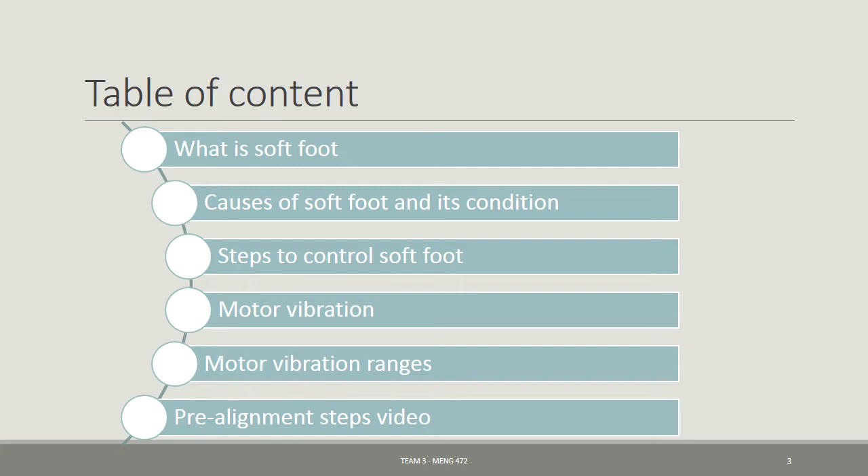What is soft foot? Soft foot is a common issue when aligning rotating equipment. It is a major cause of repeatability problems in shaft alignment measurements. In addition to alignment quality and repeatability problems, it can cause machinery vibration, reduced life in electric motors, and internal clearance problems in gearboxes and pumps.

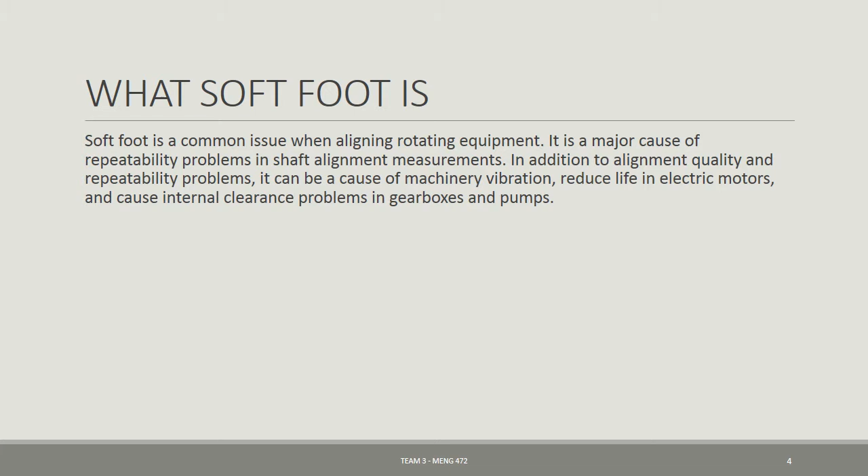Causes of soft foot conditions: twisted or warped machinery foundation or base plates; twisted, warped or damaged machinery feet; improper amount of shims under machine feet; dirt, trash or other unwanted material under machine feet; dents or other flaws in machine base or machine feet; excessive tension on machine feet due to jack bolts warping the machine feet.

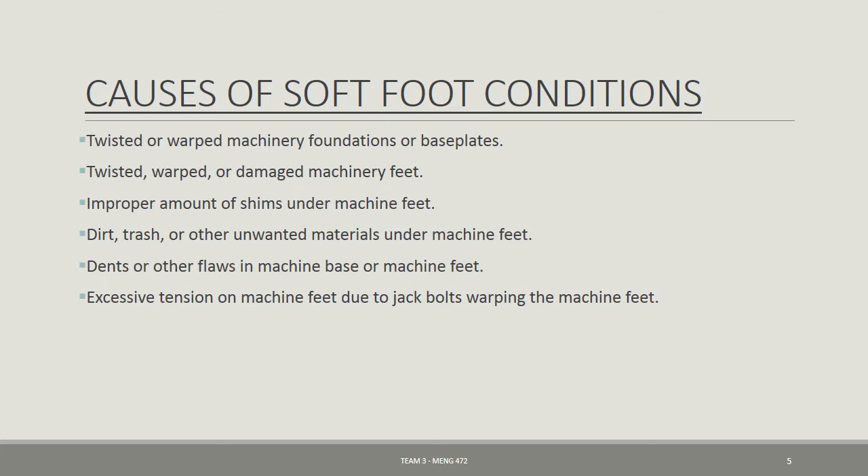In this slide we will talk about what soft foot does to your alignment: an angular or parallel soft foot, a bent or deformed shim, a bolt hole with a burr, a bent motor foot, and the last thing, a deformed machine base.

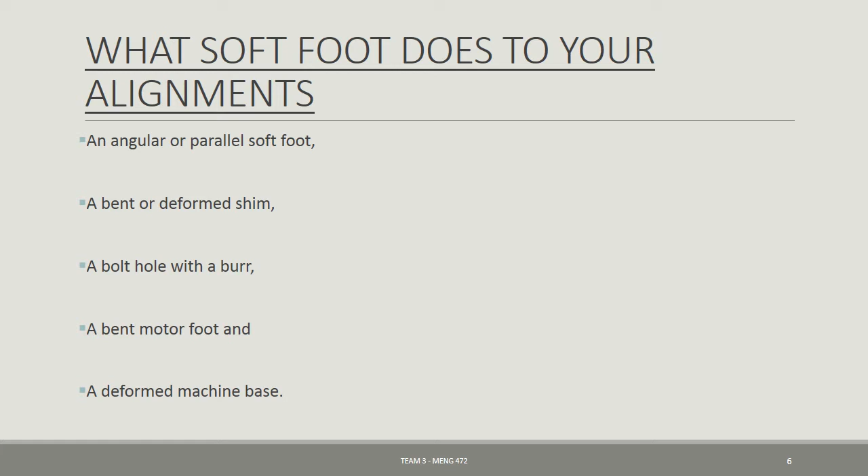Soft foot condition: the position of the shaft changing between tight and loose. If you have used laser alignment tools, you might have noticed a foot that causes a noticeable change in the vertical or horizontal readings as you tighten a particular bolt. Often this is the location of the soft foot condition.

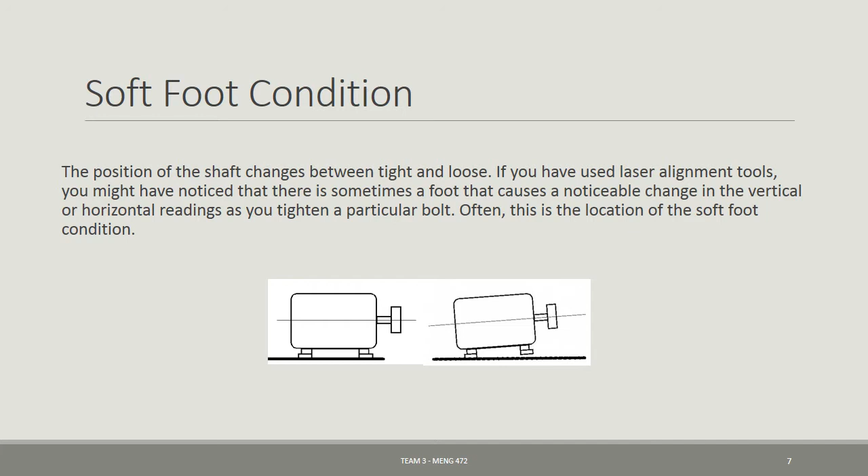How to differentiate soft foot from misalignment and looseness. To differentiate soft foot from misalignment and looseness, even though it causes misalignment when present: one way is to loosen each foot bolt at a time, while the other three are tight. If loosening one of them reduces vibration amplitude...

This tells us, in short, what should be opposite to what one would expect if the machine was okay, and we cause looseness by unscrewing the bolt.

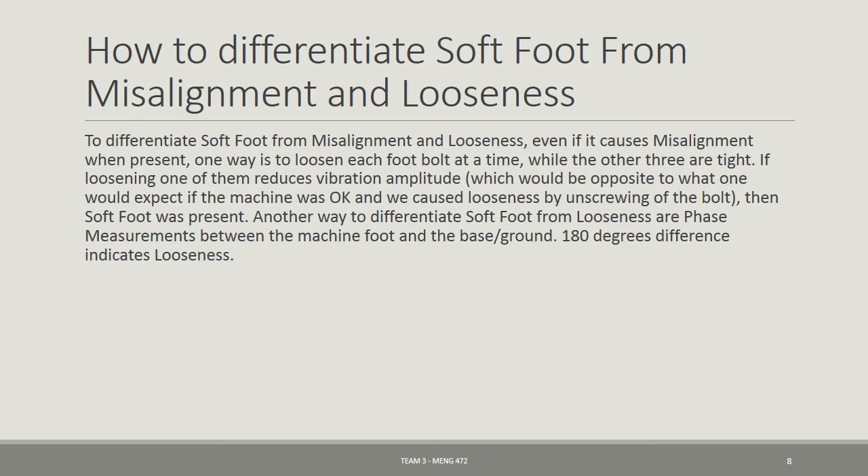Steps to minimize and control soft foot. عندنا هنا بعض الخطوات إنه نقلل أو نتحكم في السوفت فوت. واحدة من الخطوات هي confirm that base plate and foundation are installed and level to specification.

Another step is to make sure the base plate and machine feet are clean, deburred and free from dents in areas to which machinery will be mounted. يعني نتأكد أن السطح اللي يكون عليه المشين نظيف، ما في أي شوائب أو نتوء، عشان ما يصير misalignment، فحتكون المشين على سطح مستوي.

The third step we can use is to use clean flat shims. If you must cut thicker shims from steel stock, be sure they are clean and flat and deburred. عندنا الشيم كما في الصورة في زاوية السلايد، هذا الشيم قطع حديدية ممكن تتحط في جهة من المسامير.

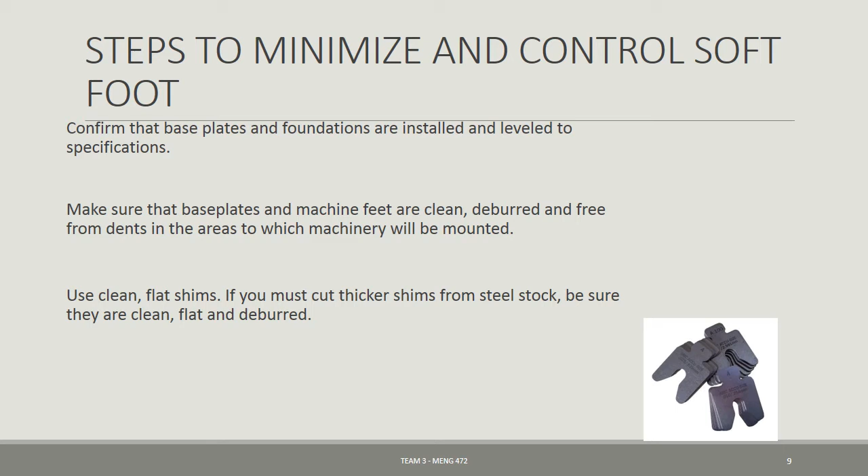نكمل الخطوات اللي نقلل أو نتحكم فيها السوفت فوت. واحدة من الخطوات: when the machine components are placed on the base plate, rough align and perform a gross soft foot check of both the movable and stationary machines.

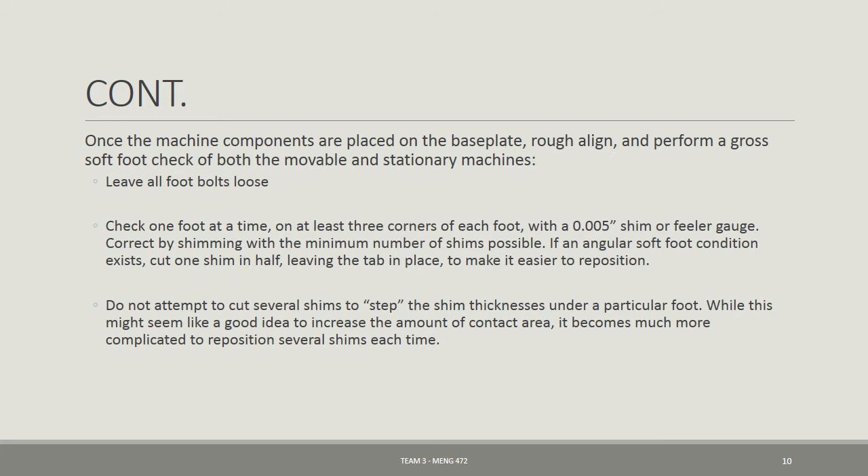Small vibrating motors have been with us since the 1960s. Initially, they were developed for massaging products, but development took a new turn in the 90s when consumers required vibra-call on their mobile cell phones. Today, designers and users alike have learned from 2 decades of mobile phones that vibration alerting is an excellent way to alert the operator of an event, especially when your phone is on silence.

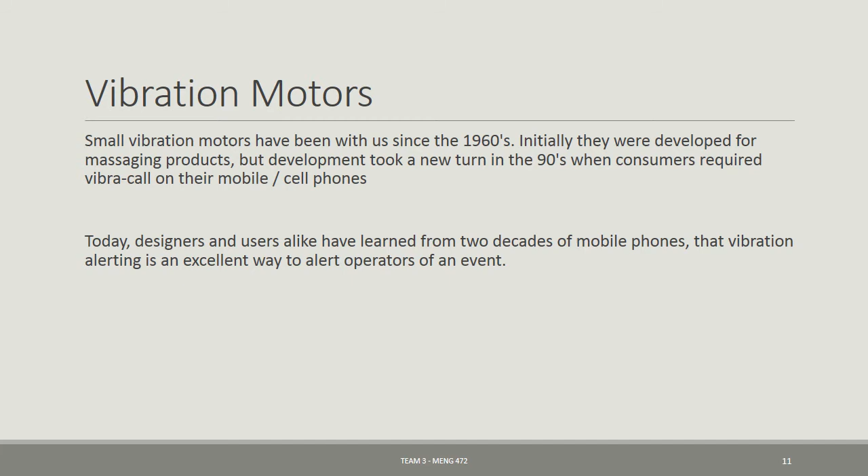These miniature vibrating motors are used in a wide range of products like tools, scanners, medical instruments, GPS, and control sticks. Vibrator motors are also the main actuator for haptic feedback, which is an inexpensive way to increase a product's value and differentiate from competition, like for example toys, console controllers, and the like.

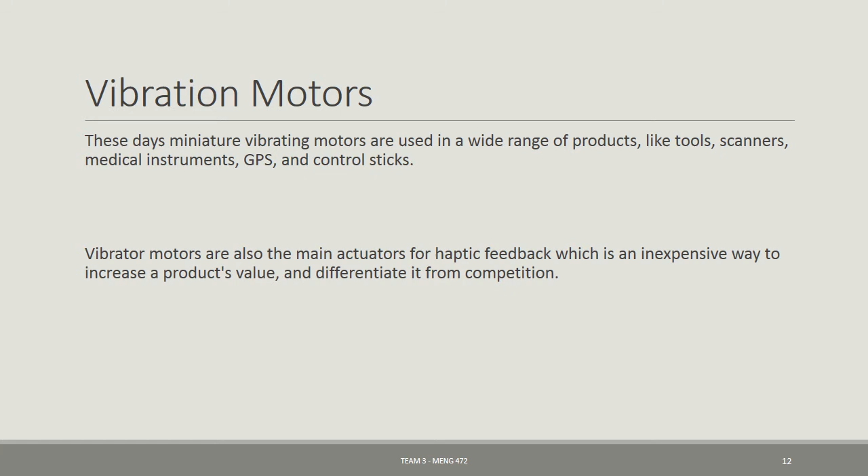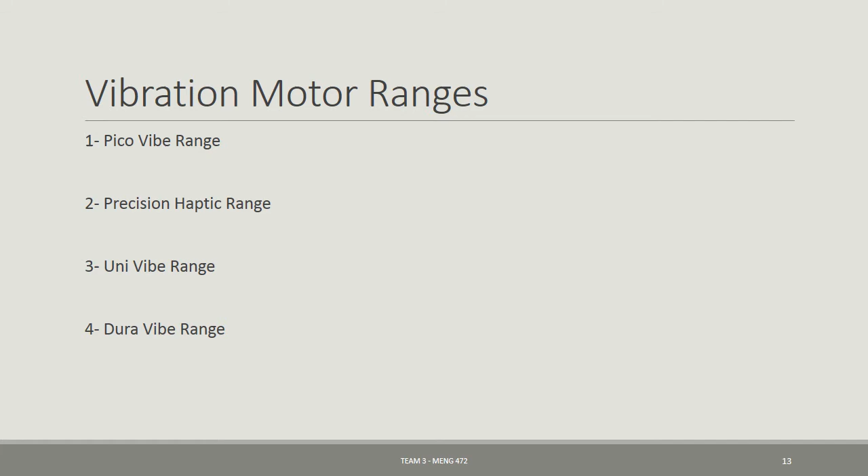There are different ranges for each vibrating motor. First, the Pico Vibe range. Second, the Precision Haptic range. Third, the Uni-Vibe range. Fourth, the Dura Vibe range. We will talk about each range in the following slides.

First, the Pico Vibe range, shown on the right side of the slide. Pico Vibe motors are popular for use in handheld products because their variety of shapes and sizes make them easy for design and mounting. They can also be used in massaging and stimulation applications, provided they have enough power.

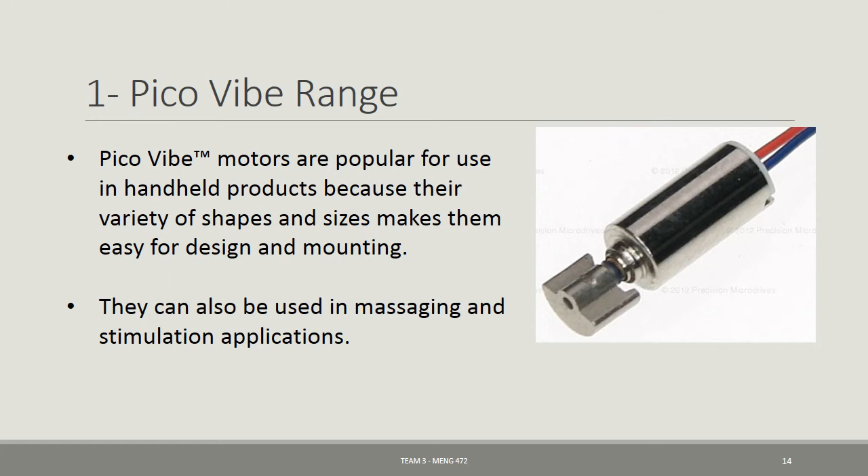My name is Walid Al-Ghamdi and I will continue the vibration motor ranges with the second one, which is the Precision Haptic range, used in a variety of haptic feedback applications like touchscreen mobile phones, GPS units, tablet PCs, desk phones, and even toys.

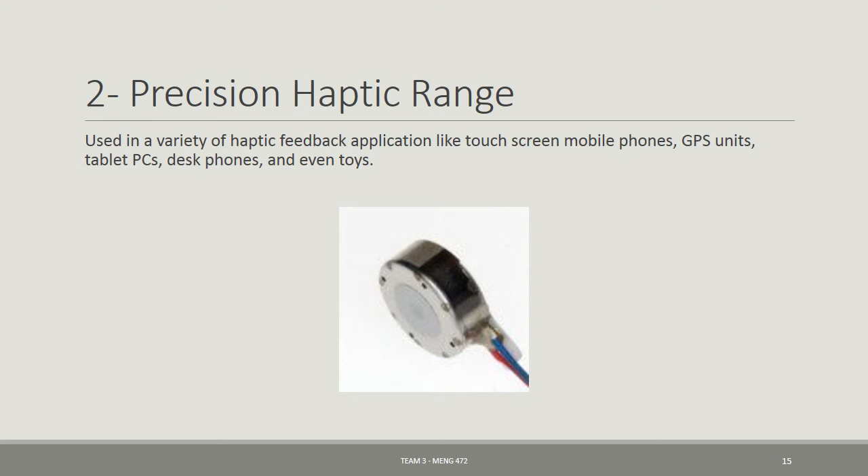The third one is the Uni-Vibe range. They are similar to the smaller Pico Vibe range, but with heavier eccentric masses and higher drive voltages, used in vibration alerting, mechanical aid, and messaging.

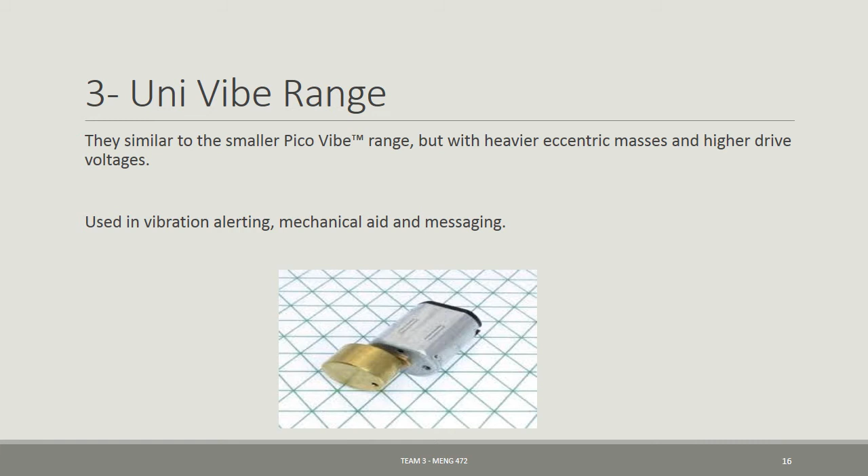The fourth one is the Dura Vibe range, a series of brushless vibration motors which are longer lasting than traditional brushed DC motors. They are ideal for applications which frequently use vibration over a long period of time, handling vibration alerting and messaging applications, commonly used brushless vibration motors.

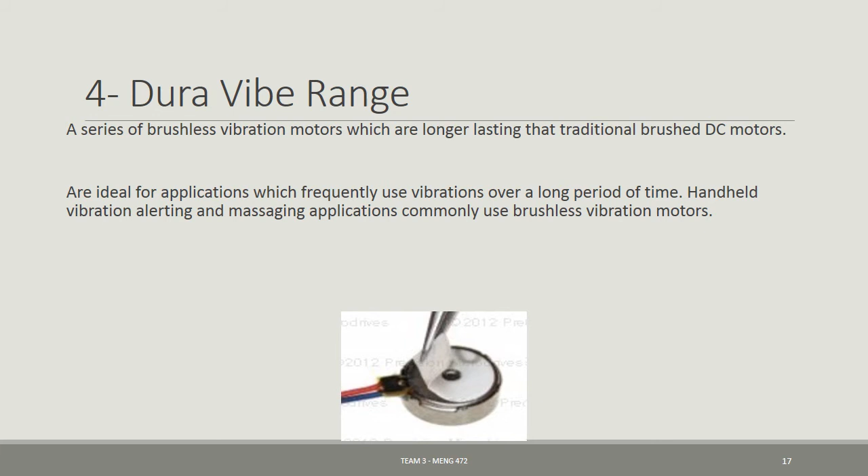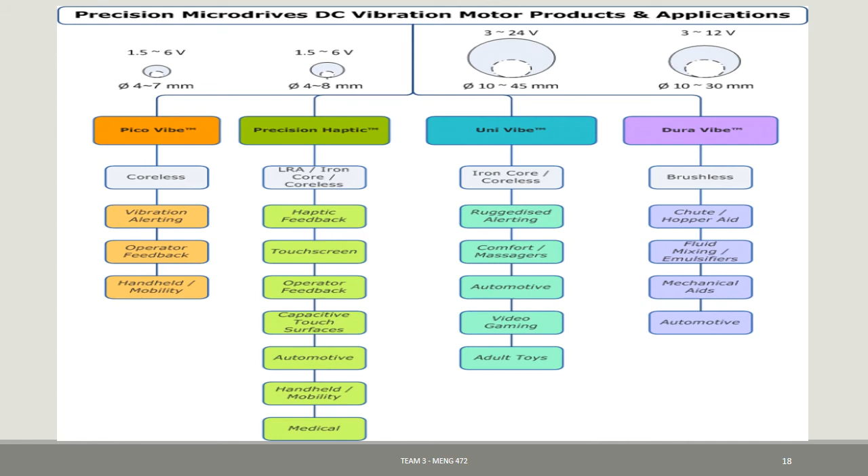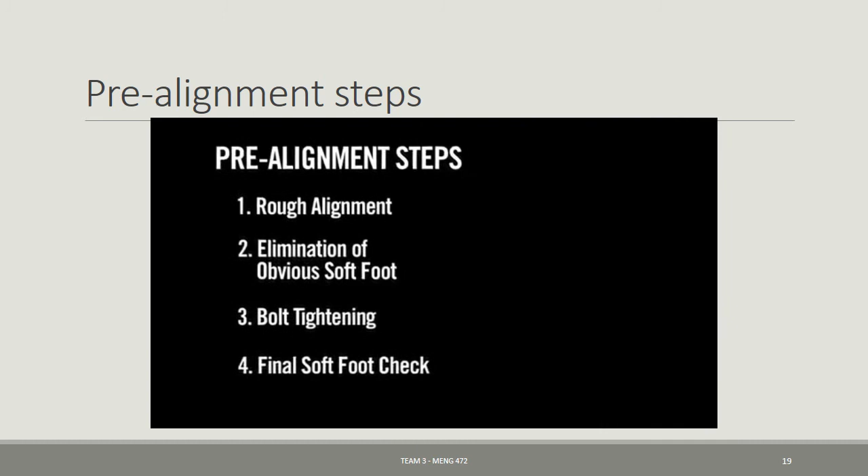In the next slide, we are showing the pre-alignment steps in the video. The goal and purpose of these pre-alignment steps is to control or get rid of any unintended movement that might occur during the alignment process. The pre-alignment steps we'll cover are rough alignment, elimination of obvious soft foot, bolt tightening, and final soft foot check. By completing these steps, you'll prevent unintended movement.

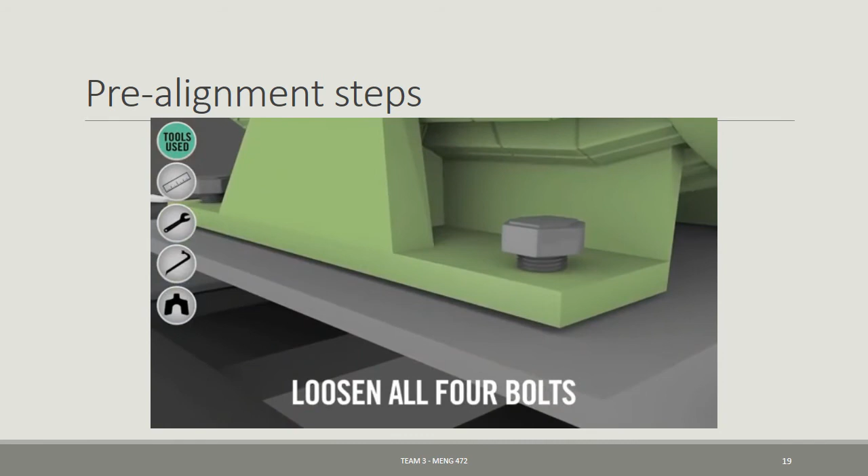The first step in pre-alignment is to rough align the machine shafts. I'm going to do that with a straight edge. I have a 50 thou shim here. I've got my straight edge on top of the pump, and that 50 thou shim drags just a little bit. So I'm going to loosen all 4 bolts and put 50 mil shims under all 4 feet.

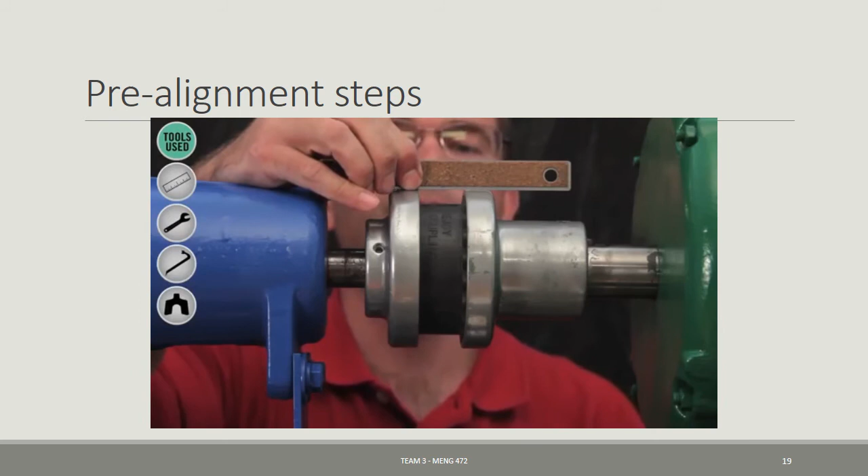I'll check again with a straight edge, and we can see that is much closer. I also check the horizontal. There we go, no offset. It's been adjusted both vertically and horizontally, so our rough alignment is now complete.

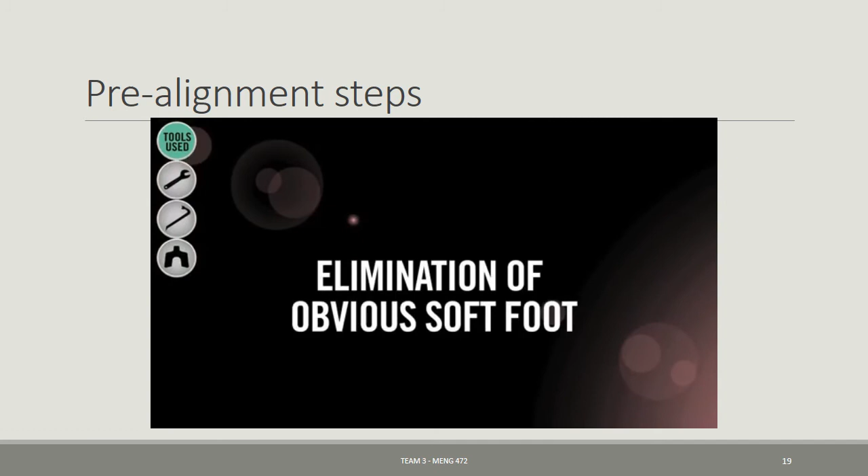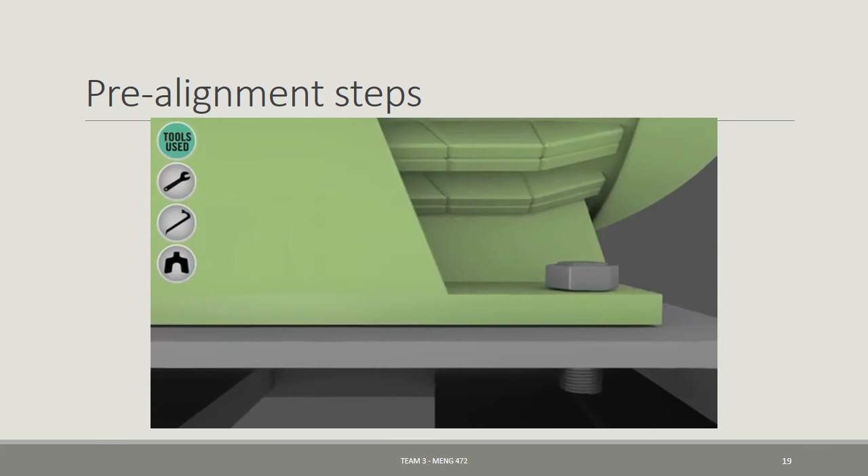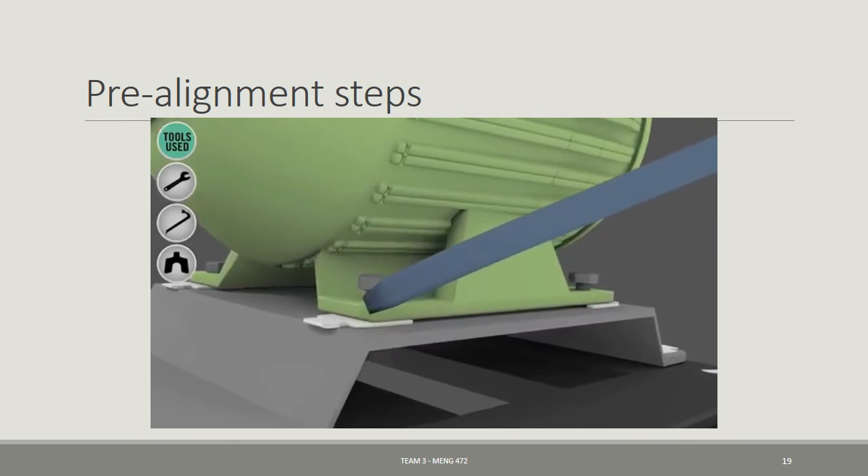The next pre-alignment step focuses on eliminating obvious soft foot. Obvious soft foot is when all 4 feet are not sitting in a common plane. If soft foot remains, then every time you loosen and tighten the bolts, the movable machine will come to rest at a different place, making it difficult to accurately measure and correct misalignment. So you want to make sure each foot is carrying the same amount of weight.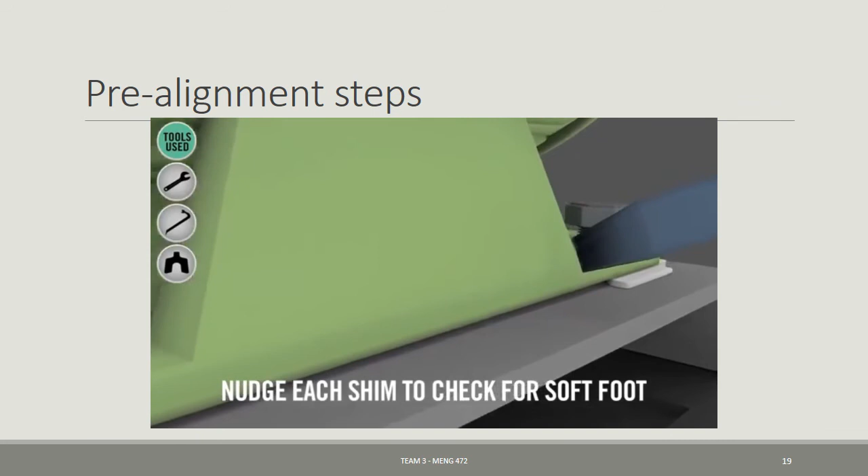Test this with all the bolts still loose by nudging the shims under each foot. See, that's obvious soft foot. This leg is sitting slightly higher than the rest, so weight is not being equally distributed. Add more shims of appropriate thickness until it's a snug fit.

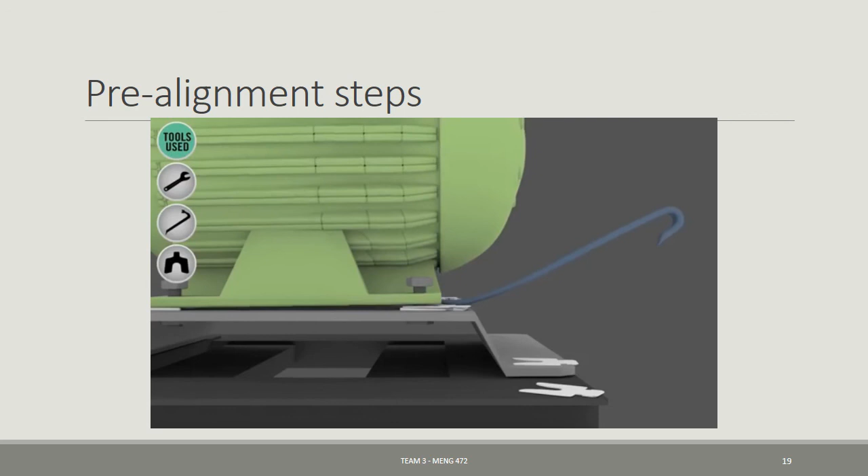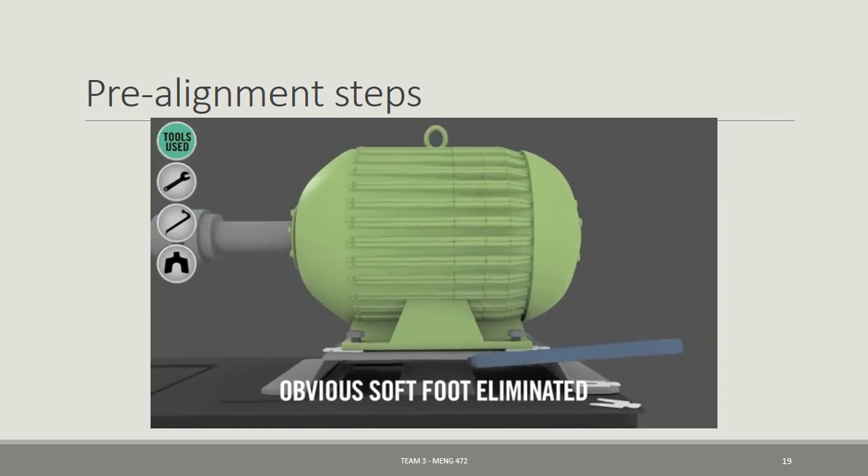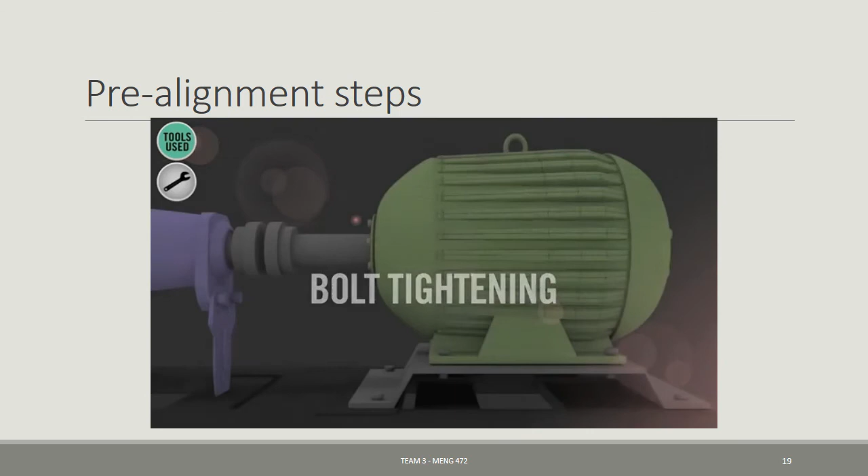Next, you'll want to tighten the bolts down, and we have a specific method for this. Most people are too aggressive with this part, so it's important that you bolt the movable machine down the same way every time. We recommend a cross-torquing pattern to help us remember this. We also recommend making at least 2 or 3 passes in sequence.

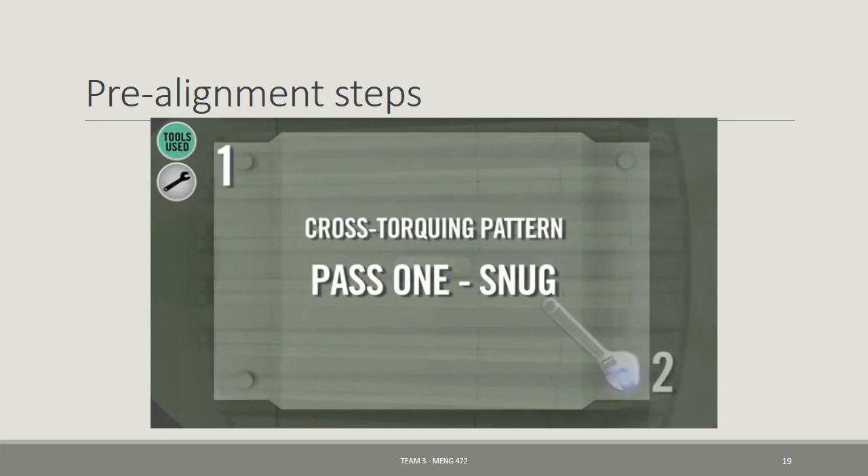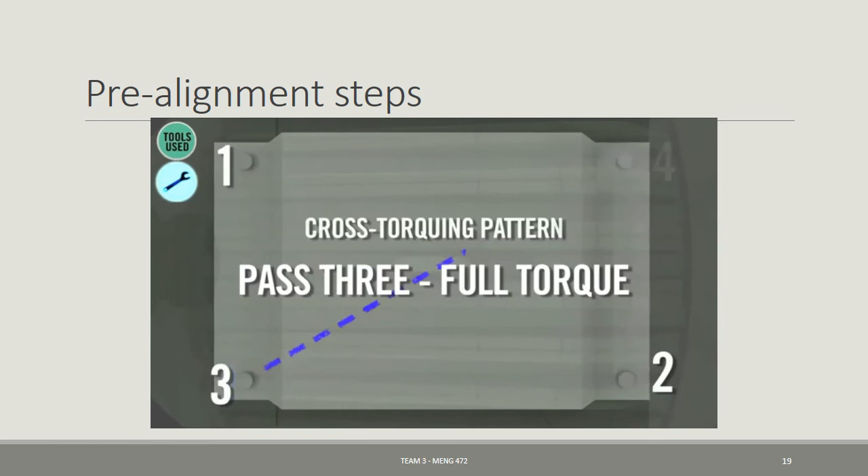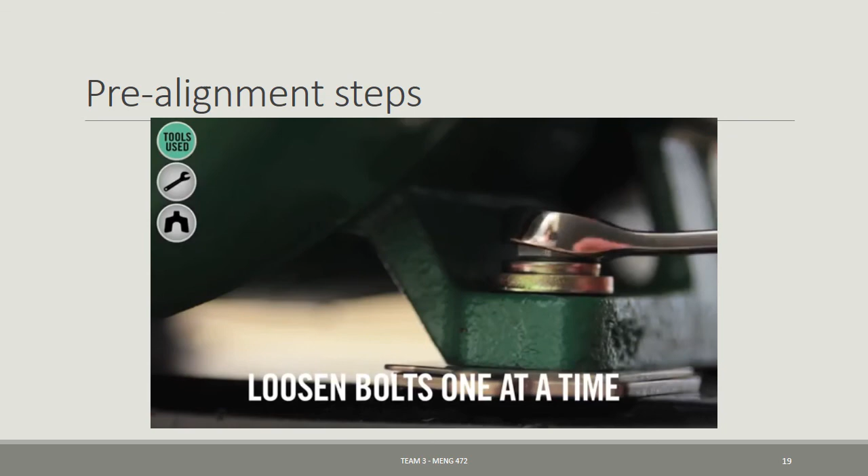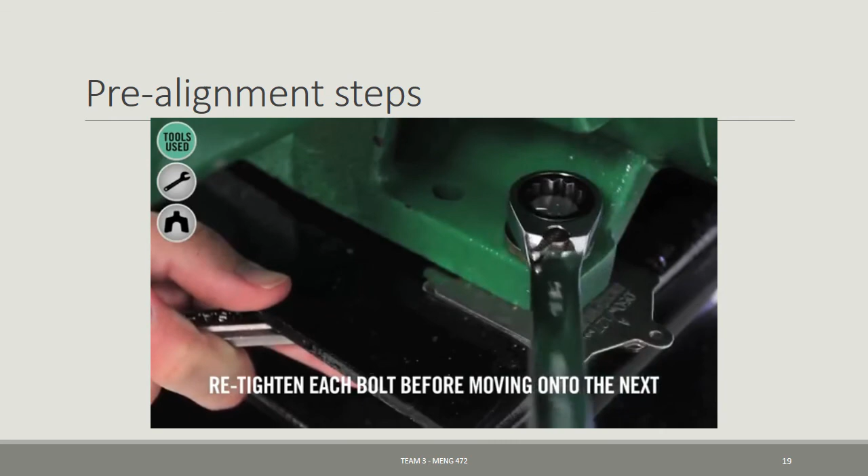So now we've completed torquing down the motor. All the bolts are tight at this point, but soft foot being the problem that it is, we want to check one more time. This time we're going to check it 1 foot at a time. Loosen the bolts one at a time, and try to slip a 2/1000 shim under each foot. When checking each foot, make sure to tighten each bolt before moving on to the next. Add shims if you need to, but if nothing will go under, you will know that you have an equal weight distribution.